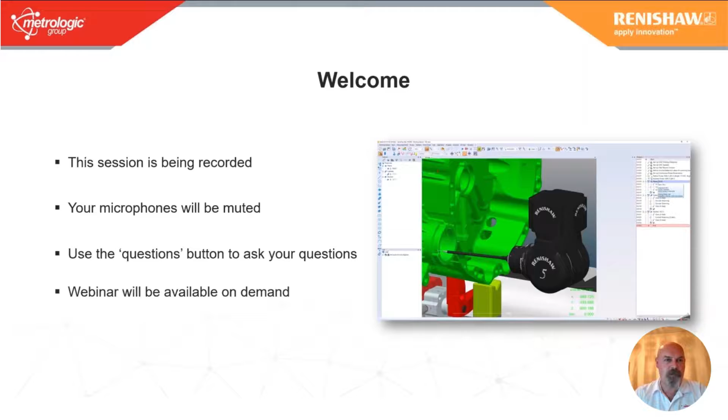So our agenda today: we're going to do a brief overview of Renishaw and Metrologic, then look at the Renishaw 5-axis technology and run through the capabilities and offering, followed by a look at the Metrologic Silma X4 offline and X4 online software solutions, and then look at both new and retrofit applications with 5-axis technology and the Metrologic Silma and X4 software to leverage the best from that technology.

First of all, Metrologic Group. Metrologic Group was founded 40 years ago, based in the French Alps near the city of Grenoble. We're the market leader in agnostic metrology software, meaning that our software is not reliant on individual manufacturers' hardware - it can work with the majority of hardware platforms available in the market. We became part of the Sandvik Group in 2018, and this gives us huge backing and support for our development, growth and future.

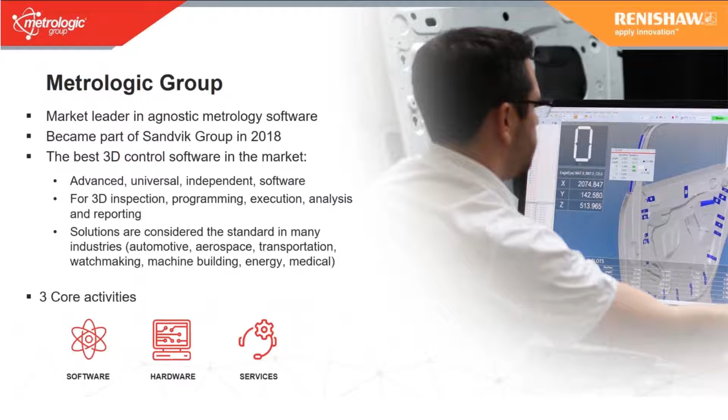Metrologic is based around three main activity areas. The primary activity is our software, which is what we're going to talk about today. But in parallel, we do have hardware available, and we also offer retrofit and calibration services where appropriate. Today, though, we're going to concentrate on the software offering.

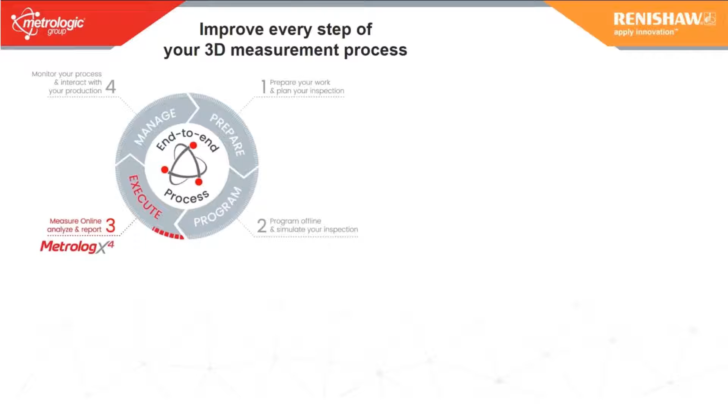Metrologic software offers solutions for all areas of your 3D inspection process, covering your full production environment. We have our Planner X4 solution, which allows you to prepare and plan your inspection process, including PMI data management. We then have the Silma X4 offline virtual twin software, which allows you to pre-program your inspection and create your test parameter programs - it works with both CMMs and also robot scanning systems.

We then have the Metrolog X4 software. This is the software that drives programs that are run live. It's a universal application that can be connected to virtually any kind of 3D CMM, portable device, or even robotized inspection cell. It allows a full geometric and freeform measurement analysis of the parts in a smart, robust, efficient, and simple manner. The final piece of software making up the suite is the Manager Suite.

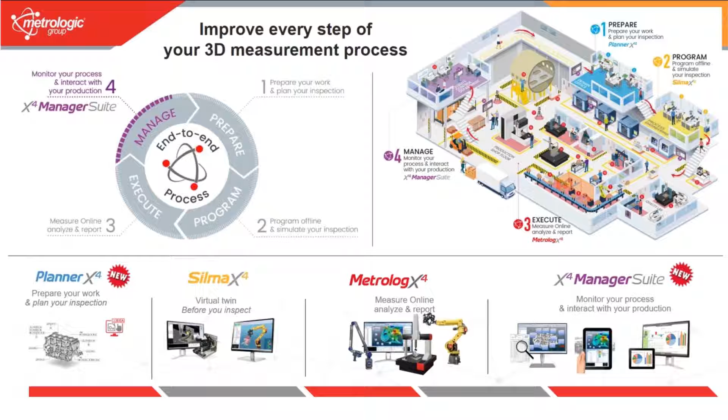The Manager Suite is a tool that allows you to view live operational information from all of your test equipment. It also allows you to capture, monitor, and manage the efficiency of that measurement process. All of the Metrologic tools can be used either as standalone or as complementary solutions to your existing setup or to each other. So I'll now hand over to Paul, who will discuss and present the Renishaw solution.

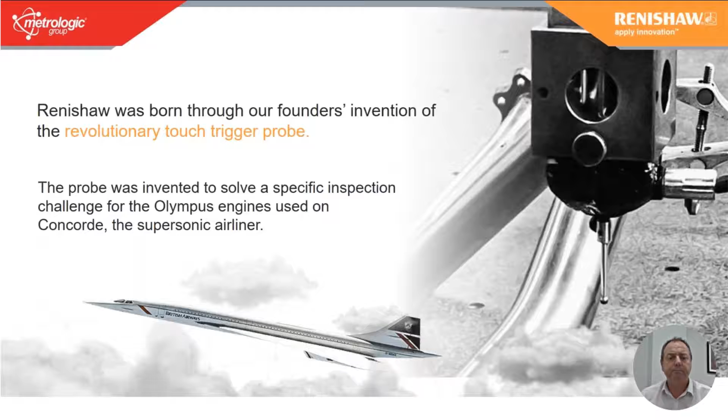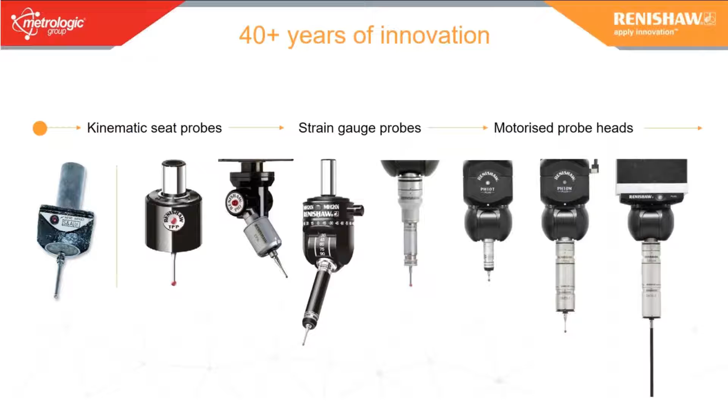We started with basic kinematic touch trigger probes and improved their performance using strain gauge technology. We then introduced capabilities such as stylus changing racks to add productivity to coordinate measuring machines. Then we introduced indexing heads, and our PH10 motorized head has continuously evolved and is still in use on the majority of CMMs made today.

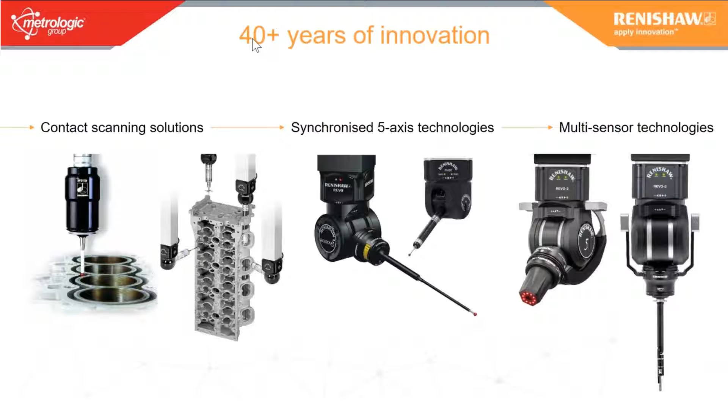And we've continuously developed fixed and modular scanning solutions for use on these motorized heads. More recently, the move to 5-axis measurement technology represents the biggest step change the company has ever introduced.

Having developed the original probe for coordinate measuring machines, Renishaw has since expanded its product portfolio to address challenges in and around CNC machining, with the first on-machine probing and tool setting systems, technologies for CNC machine performance monitoring, and

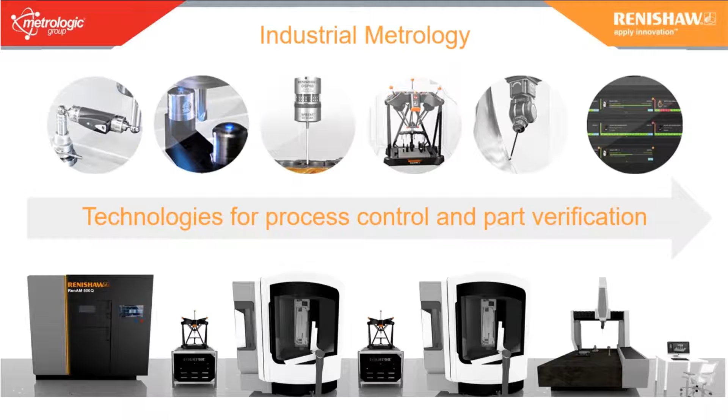more recently shop floor gauging systems to provide control throughout the manufacturing process. And today, we add value by bringing metrology to the shop floor with direct feedback at the point of manufacture. Renishaw technologies allow our customers to boost their productivity through faster setup, improve process capability, and reduce quality costs.

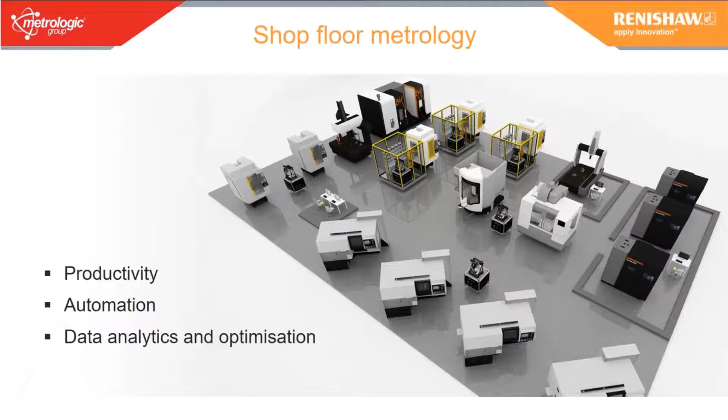On-machine and near-machine measurement systems are critical for the automation of decision-making and process adjustments. And all these systems provide process information which is collected throughout the manufacturing sequence and is a fundamental data source for Industry 4.0. But the focus for today's webinar is around 5-axis systems for coordinate measuring machines.

So first, I'm going to explain why infinite positioning of a probe head brings many advantages to CMM measurement. Then, how these 5-axis technologies are uniquely capable of delivering accurate CMM measurement at unprecedented speeds. And finally, how the REVO system is a future-proof platform for multi-sensor measurement capability.

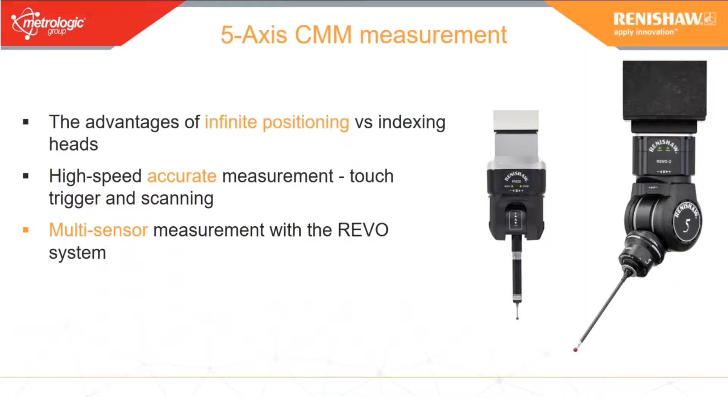So firstly, the advantages of an infinitely positioning head reduce the complexity, the time, and potential for errors in CMM measurement. Because the advantage of an infinite positioning head is that the probe and stylus are always at the right angle and you measure relative to the part. This also means fewer stylus setups, and we have an example of that in a later slide.

But the biggest operational benefit of a 5-axis head is the speed at which you can measure. And here's my colleague, Andy Holding, who will explain exactly how this is possible.

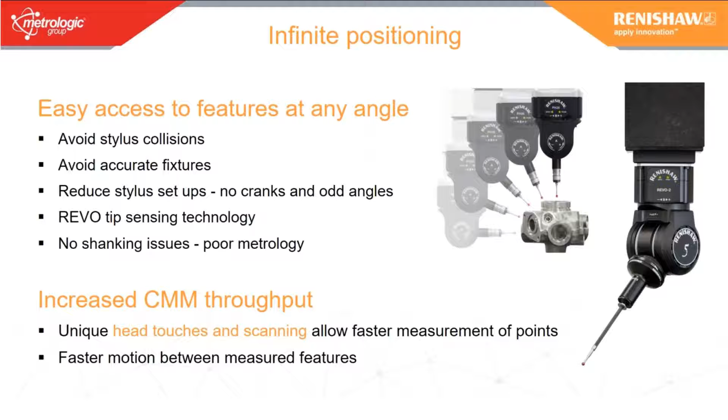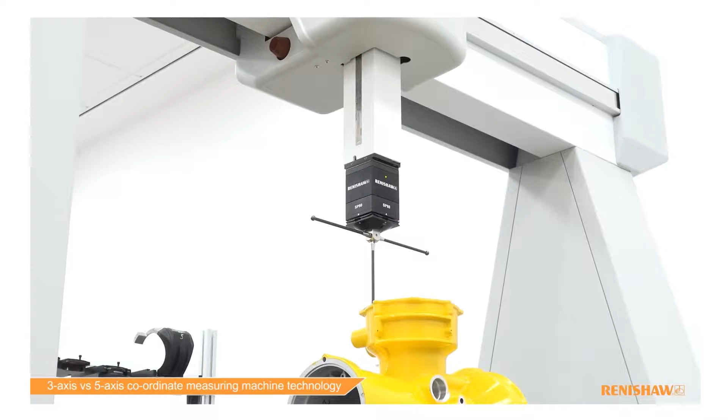Traditionally, there's been a speed versus accuracy compromise when it comes to coordinate measurement machine inspection. Some CMMs can move pretty fast, but when it comes to scanning a part feature, they're slowed right down to minimize any dynamic errors associated with the inertia of the large machine elements. This counteracts any of the potential cycle time gains made by having a fast machine.

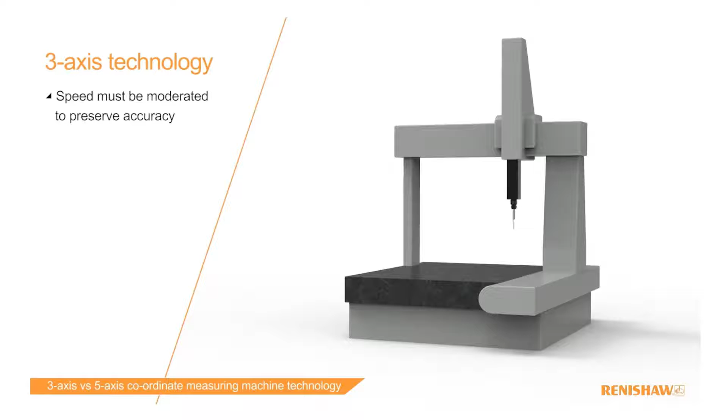CMMs will employ either a 3-axis or a 5-axis measurement system. There are some significant differences between the two. With a 3-axis system, the faster you move, the more dynamic errors are introduced to the system. This is because measurement data can only be collected by moving the 3 axes of the machine, and the inertial forces caused by the acceleration and deceleration of the machine structure introduce detrimental effects on the performance accuracy of the system.

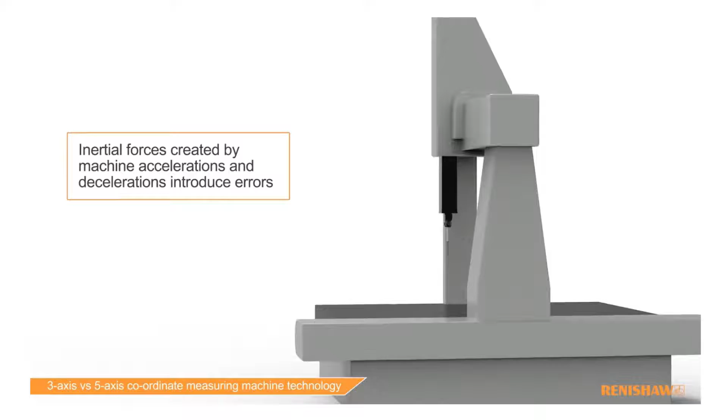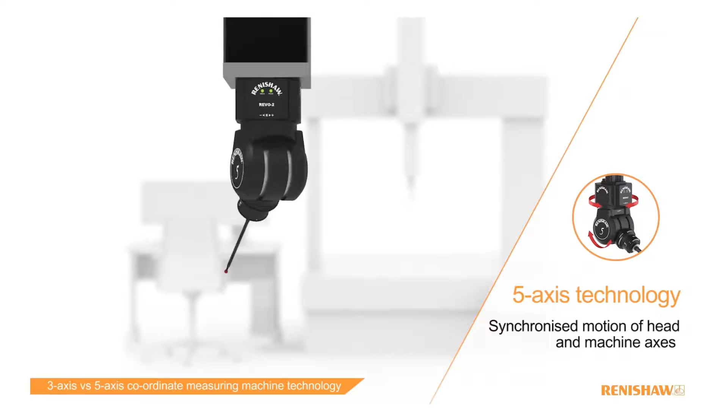5-axis technology, which is only available from Renishaw, moves the X, Y, Z of the machine and the A, B of the head simultaneously. So instead of driving the machine at high speeds and accelerations, machine motion can be smooth and continuous, whilst leaving the head to do most of the work.

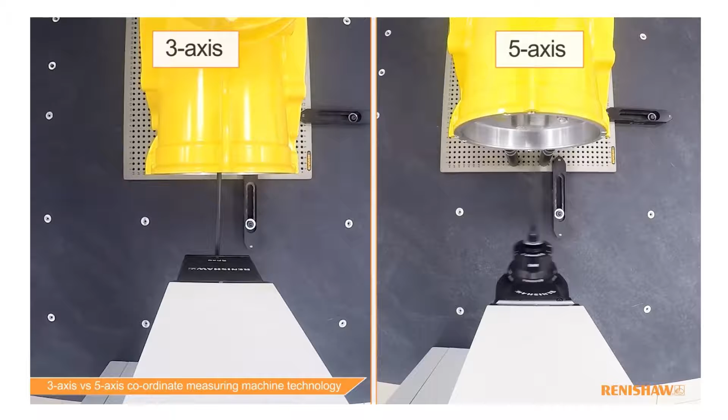Over the lifetime of a CMM, the load placed on the moving elements of the machine is much less detrimental to its performance. So when it comes to maintenance, the replacement of items such as drive belts and air bearing assemblies will be less frequent with a 5-axis system.

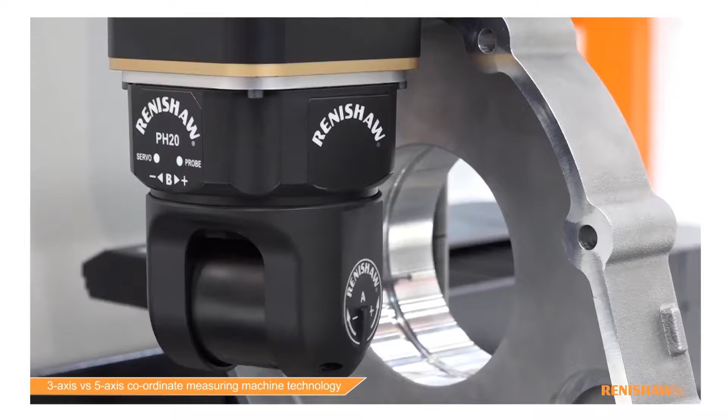5-axis technology from Renishaw is available as part of a touch trigger only system with the PH20 probe head, or as part of a REVO multi-sensor system. Each 5-axis system is complemented by a sophisticated motion control system which communicates between the machine and the metrology software to provide fast, efficient data collection.

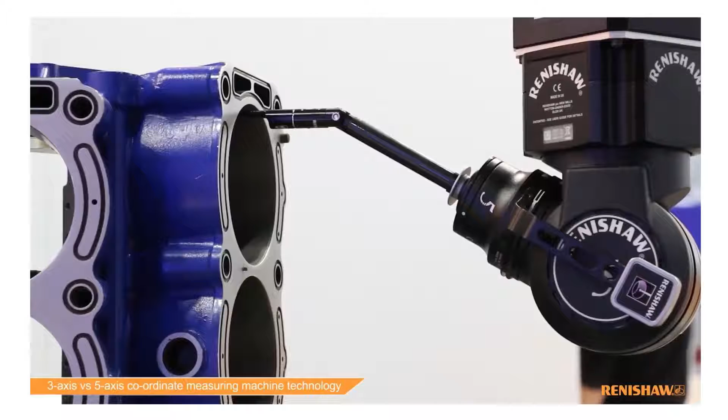5-axis systems are used extensively throughout the aerospace, automotive, oil and gas, and even consumer electronics industries.

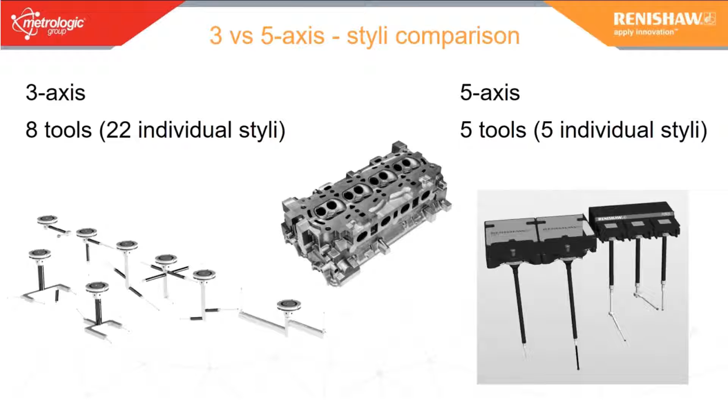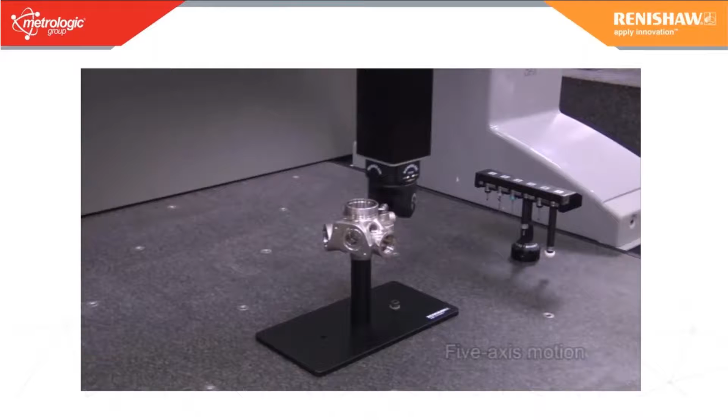So here we have some video footage of the PH20 touch trigger system in action, and as you can see, the head is making all the moves, so therefore it can measure features very quickly. Here you can see the speed at which the head can move between features, because we're indexing to the next angle on the fly as the CMM moves.

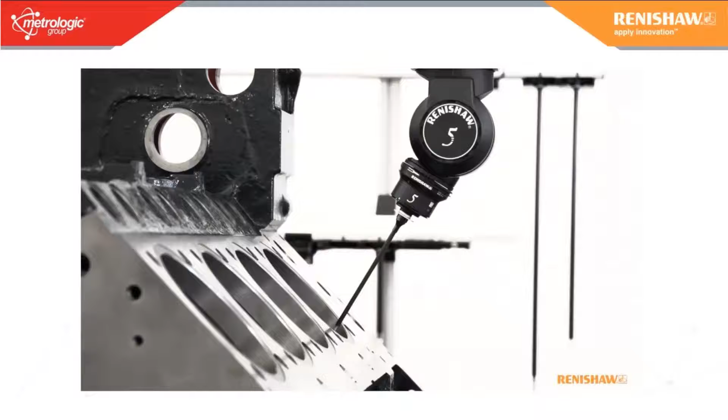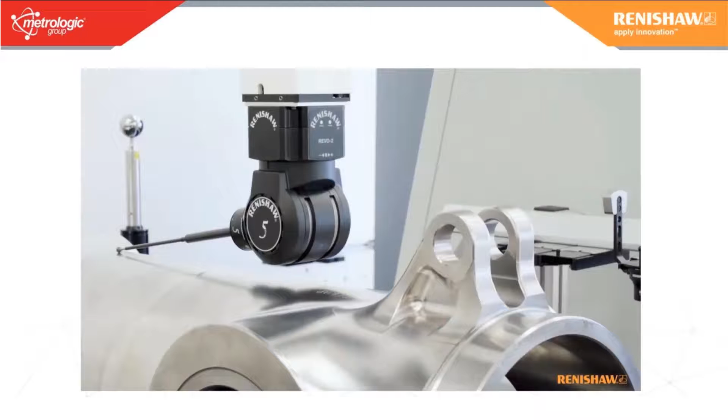And this is the REVO 5-axis scanning system, and you can see here with our tactile scanning head and sensor, we can very rapidly move across the part using the head to make most of the moves. It allows you to capture large amounts of data very quickly. In this particular measuring cycle, you can see the CMM is moving at constant velocity.

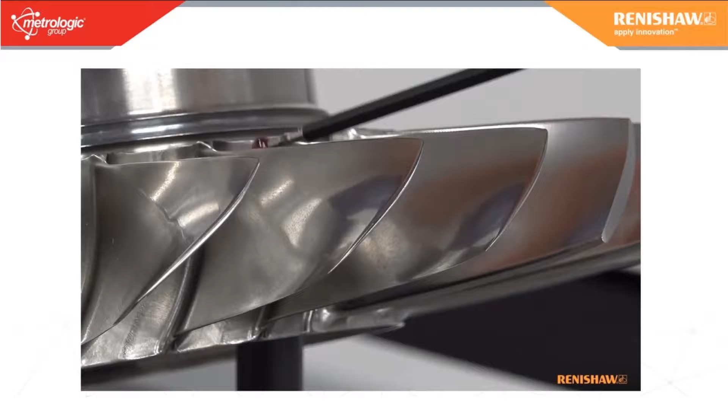So this is where we have a laser in the probe, which shines down the hollow shaft, reflecting from the tip, to give us a unique tip sensing capability.

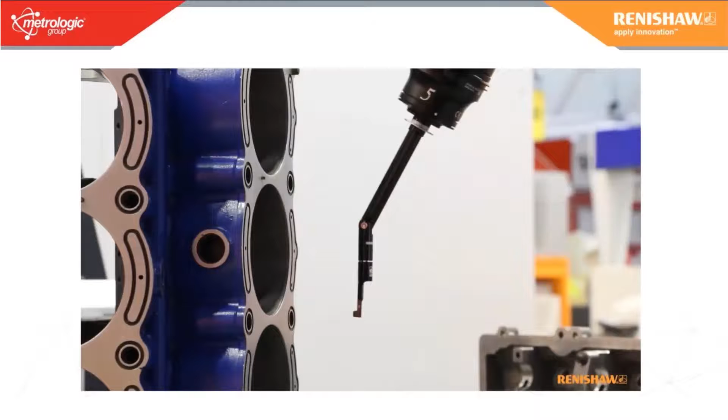As you can see here, the head moves very quickly as we scan the gasket face in an automotive application. The multi-sensor capability of the REVO head allows us to carry out surface finish measurement on the same system, the same CMM, where we've made all the dimensional measurements.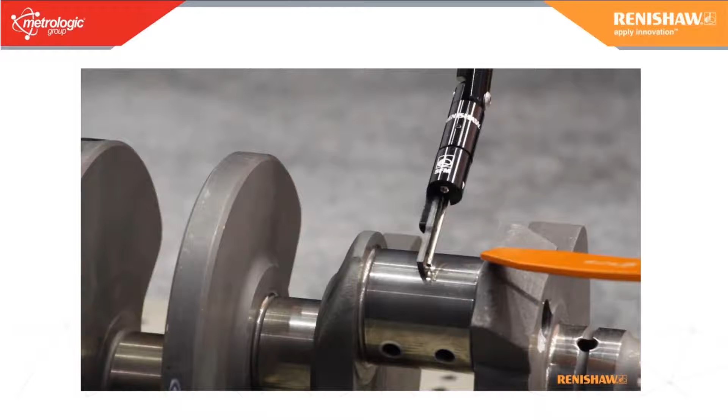So here we have the infinite positioning capability of the head to orientate the stylus pickup for faces, for bores. In this case, we're doing a lateral scan on a bearing journal, which is normally quite difficult to do with a manual gauge. Here we can see that the multi-sensor capability of the REVO system allows us to make surface finish measurements on the same device.

And the combined measurement time is less than the dimensional measurements used for comparison. Making all these measurements on one device means there's less waiting, less movement of the part between different devices in the lab, less people, and less floor space. So as you can see, the benefits of 5-axis CMM measurement are significant.

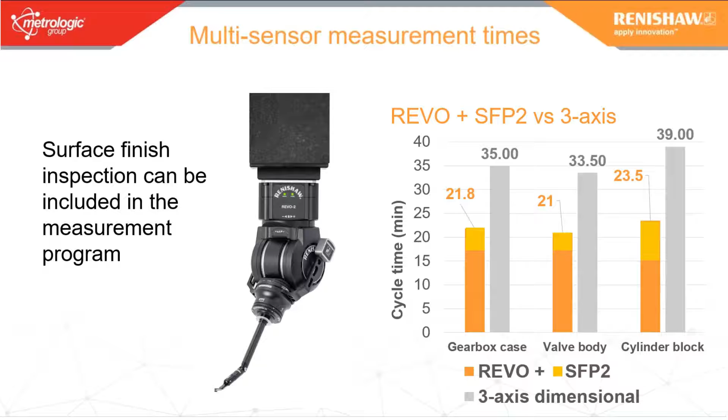Thanks very much, Paul. So having seen the capabilities of the 5-axis probes from Renishaw, let's look at how that can be maximized using the Metrolog software, Metrologic X4 and Silma offline.

We're going to start looking at the offline solution, which is the Metrologic Silma X4 product. This is a software that allows you to generate a virtual twin and allow offline programming. Programming can be a very demanding and time-consuming activity. It requires a lot of focus and attention.

And most CMM legacy software uses a DMIS program engine. DMIS is a standard programming code with specific structures and syntax which require a lot of expertise to use.

The Silma X4 offline programming and simulation software generates a digital twin, and this facilitates part programming with the advanced smart toolkit contained in the software, which allows an operator to simply and quickly generate a robust DMIS program, ready for implementation on your measuring stations.

Because Silma X4 delivers a pure DMIS code right up to the latest V5 standards, it's therefore compatible with most measurement analysis softwares available currently on the market. It provides you with smart virtual programming.

You can quickly generate your CMM paths. You have potential collision detection built into the software, automatic collision avoidance, and path optimization. These are all options available.

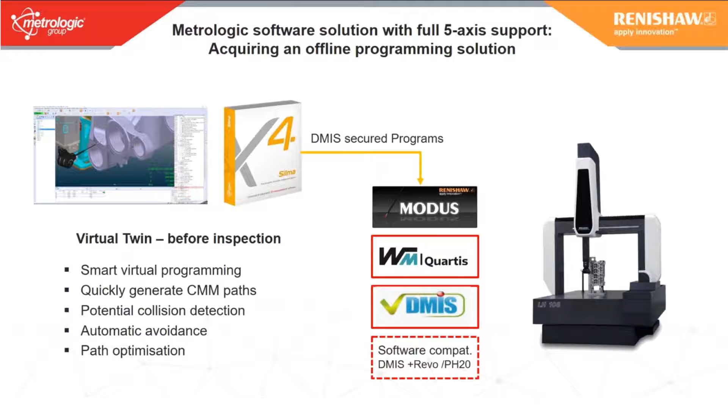So let's look at how we can generate a DMIS part program in the teach mode with Silma X4. What we're going to look at are some examples of path generation, looking at a plane measurement, which is round the gasket face.

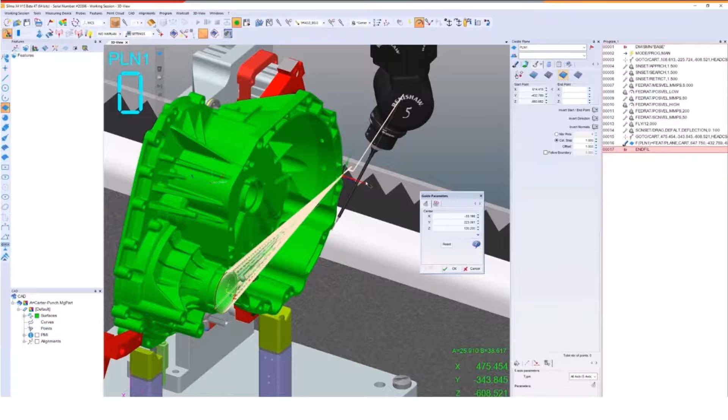In the contouring mode, we'll be looking at measurement of a helical cylinder, and then a surface sweeping measurement. As you can see on the right of the screen, we're teaching the measurement points, and then we have the animation of the actual probe in action, which allows you to evaluate before the program can be used live.

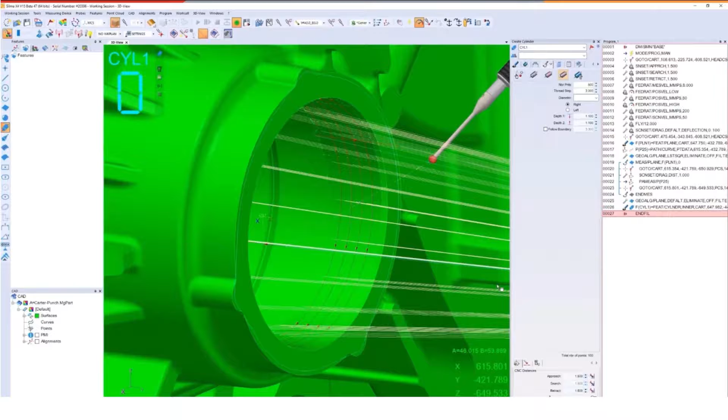What we're seeing is the creation of each feature within the teach panel on the right. So now we're looking at the helical screw thread on the internal cylinder.

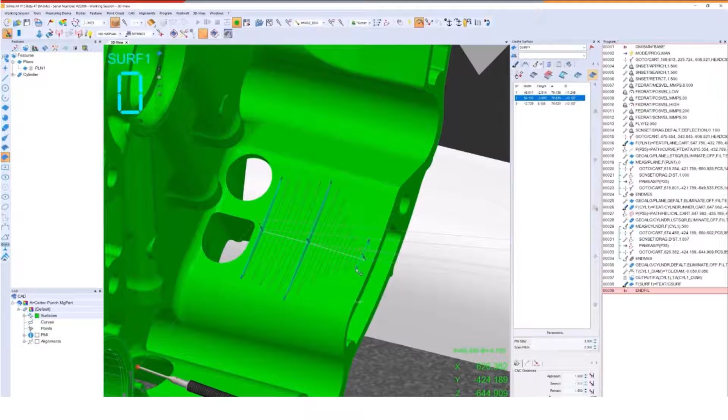We will then move across to create a surface to be swept, creating 3 reference points, and then in this case, using the graphical interface to determine the path, but it can also be determined within the parameter sets on the right of the screen.

So the measurement in the full 5-axis is completely supported here and can be managed thanks to the graphical manipulator. What you can also see is that within the simulation, the benefits of 5-axis measurement.

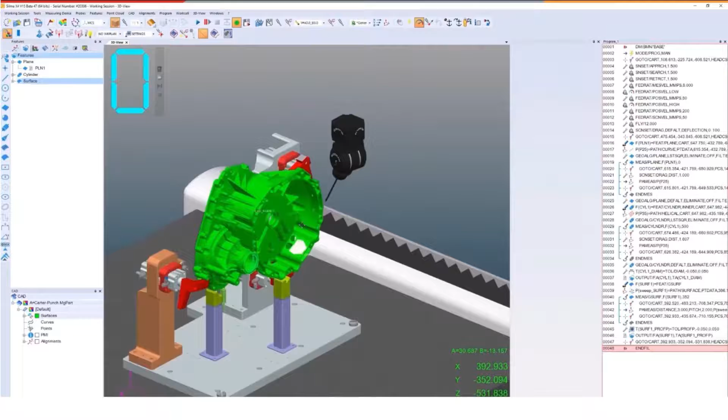It reduces the CMM movement, as Paul identified. It saves time, and it allows the probe orientation to be adjusted during the go-to path. Overall, reducing inspection cycle time and improving the accuracy in both the measurement, with reduced flex and backlash in the CMMs.

So if you're looking to invest in a new CMM, or if you're looking to upgrade your existing equipment with a 5-axis probe solution, you can also benefit from the whole X4 suite, including the Metrolog X4 software, because we have an I++ interface, direct to the UCC controller.

As we saw with the Silma X4, you have all of the programming benefits. But when you install the X4 software, you don't have to make physical changes to your CMM. There's no service requirements, there's no machine calibration, and the Metrolog X4 software can be fully installed and operational literally in minutes. That's why we're able to offer a very easily accessible free trial option.

What we're going to move on to now is to look at a scenario where we're using the X4 native program engine, and we will see the primary differences between a DMIS engine and the X4 ngprog language. Metrolog used the ngprog language, which is easily understandable with basic commands built in, and we've translated the software into 19 languages, so it's very easy to roll out wherever you are in the world.

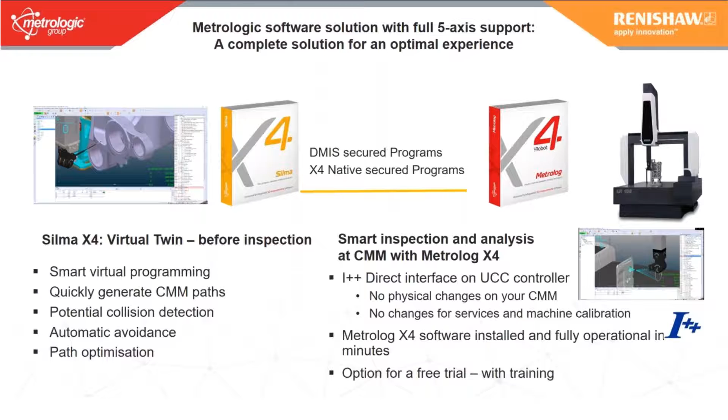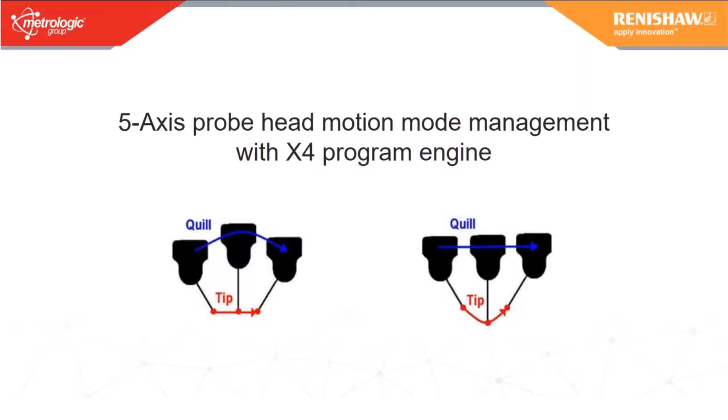The other primary feature that we operate within the software is that we can manage both the quill and tip modes that the 5-axis heads provide. For anybody who's unfamiliar with those definitions, it's something that's unique to 5-axis heads. The tip mode is where the head is moving dynamically while the tip remains fixed, and the quill mode is where the center of the head remains fixed while the tip moves dynamically. You can see them both in that video.

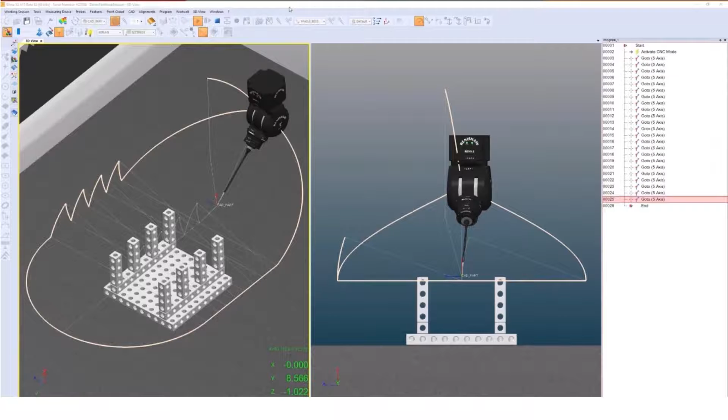So moving on to the next phase, which will be probe manipulation and path configuration within the X4 native programming environment.

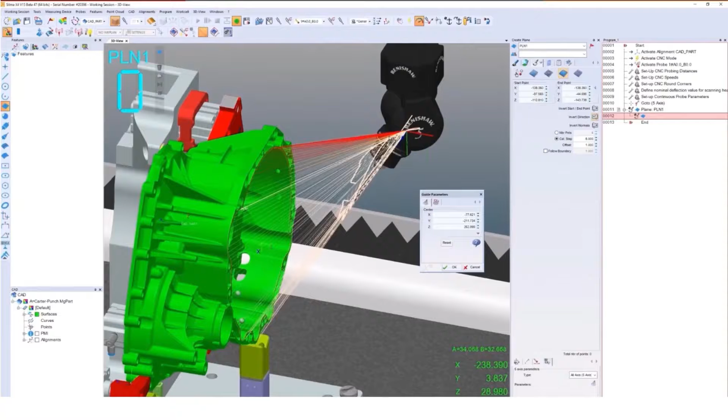What we're seeing here is we're selecting the gasket face of the piece. The software allows you to customize the probing path. In addition, you can see there's some orange and some red identifying elements. Those show you that that probing position is actually outside the optimal orientation for the probe angle. With a REVO head, that's a 60-degree angle to the surface, and 45 degrees for a PH20. So where it's red, it's exceeding that value, where it's orange, it's getting close to that value, and where it's yellow, it's within the optimal probing zone.

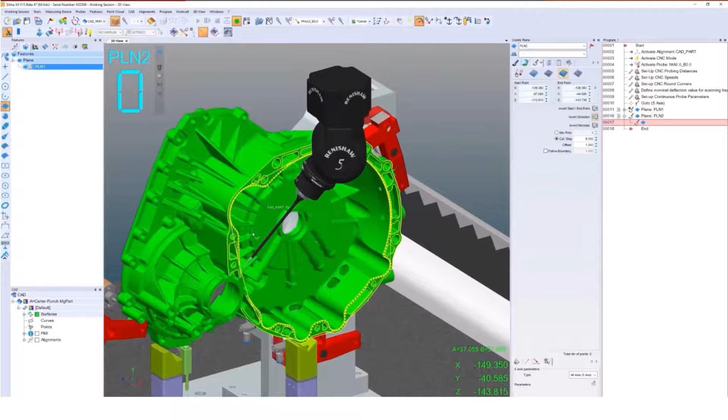You also saw in the video that we can easily manipulate the position of the head within the software to bring it within that optimal probing tolerance.

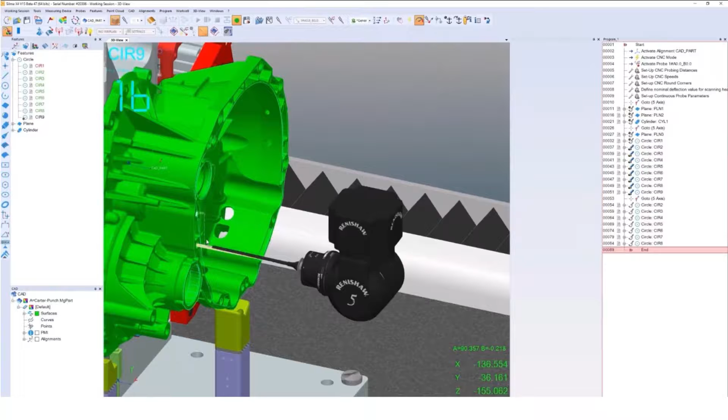Another key feature of the software is if you have multiple features that you want to measure, which are identical but differently positioned, all you need to do is program the first feature, and then you effectively copy the parameters to each other feature within the teaching frame on the right, and that then allows repeated probing of a common feature.

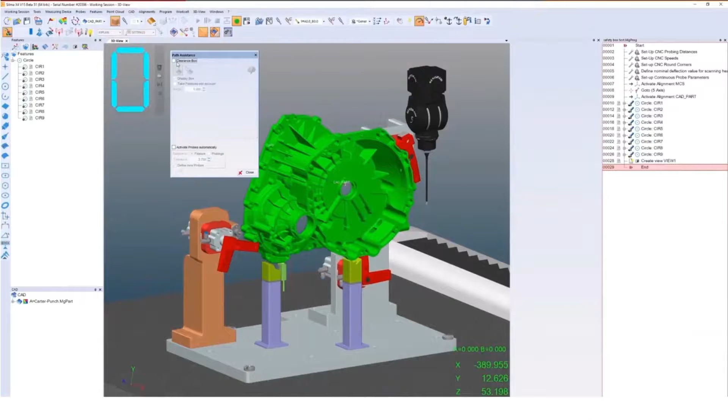One of the points that's absolutely key when you're operating a CMM with an expensive probe head on is that you have some form of collision avoidance with a safety or a clearance box. If we look at the basic management of these via point transits between features, we would normally just set up a basic collision avoidance box. This then means that any transit from different faces of the workpiece take place with all of the head and probe elements being outside of that box. Very simply, it makes for a safe environment, and you completely avoid the risk of any collisions.

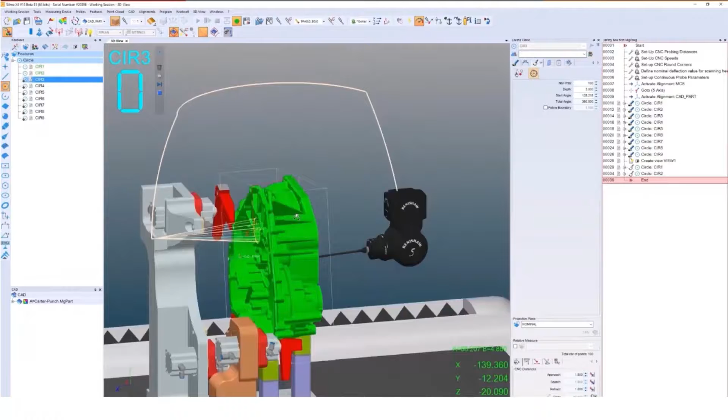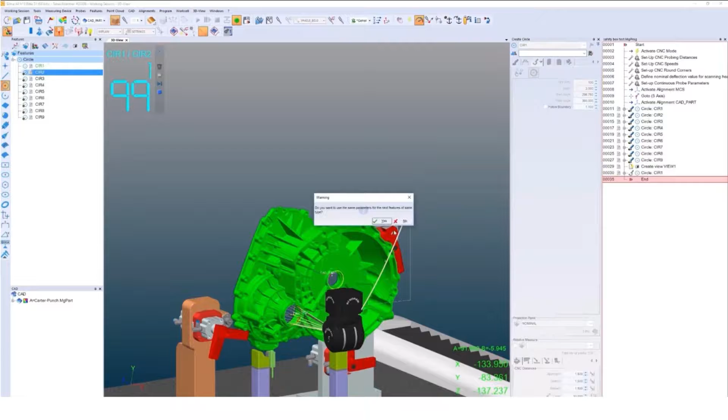So just moving from one side of the workpiece to the other. However, within the Metrolog software, we have smart collision detection and automatic collision avoidance options. What this means is that if you select the collision detection and automatic avoidance before you start creating the measurement program, the software will automatically identify if there's a collision risk and build in an avoidance path as part of the program.

You therefore have a collision-free inspection program.

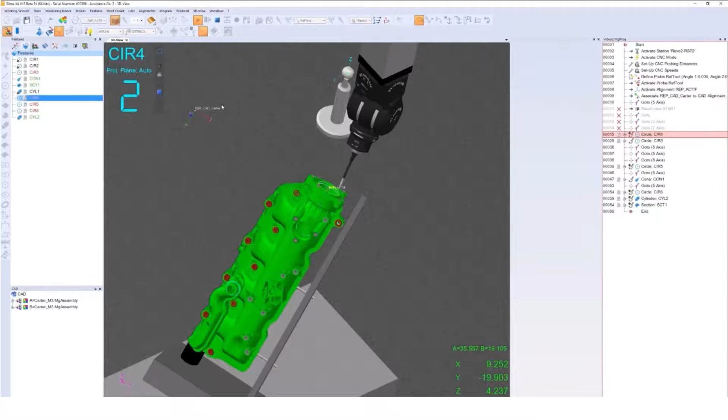What you can also do, if you haven't activated the collision detection and avoidance before you create your program, is activate it after it's been created. Then the path is automatically checked and, if necessary, modified to avoid any collisions. This is under simulated running conditions.

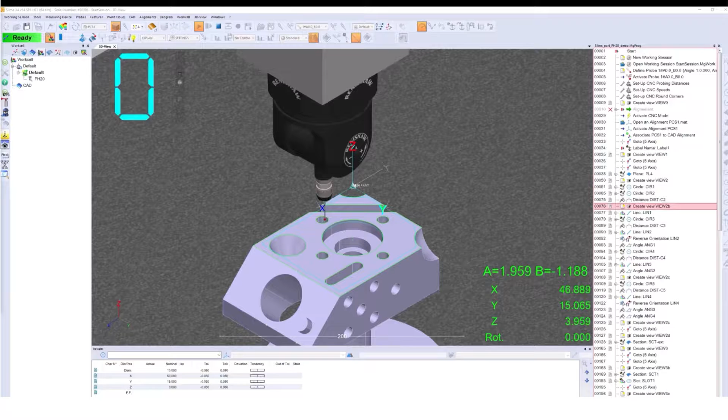We've been looking at the REVO head. When we come onto the PH20, as with the REVO head, it can be completely managed within the Metrolog X4 environment and the Silma X4 simulation software. Programs can be generated automatically, and they're easily edited as required within the software.

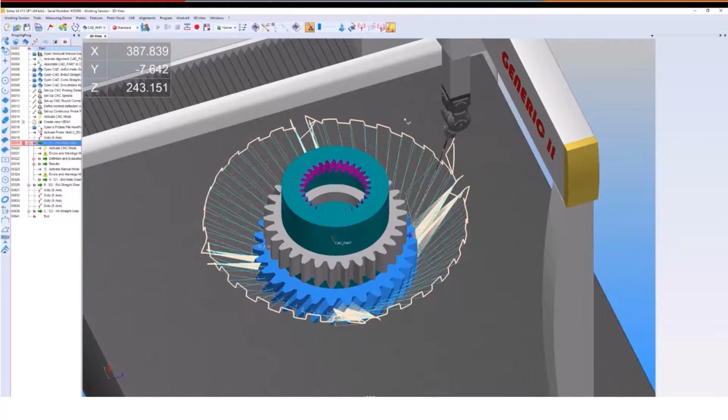When we start looking at special measurement options, one of the features available is a gear measurement solution. With this as an additional option, we can measure helical gears with an easily configured programming capability, and all of the gear parameters selected by the programmer are pre-stored within the software, using parameters defined by AGMA, DIN, or ISO norms.

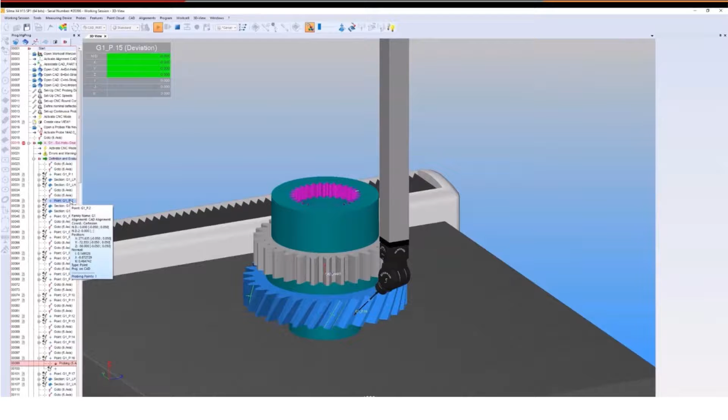So we have measurement of the helical gear using reference teeth and then running it out along the number of teeth programmed within the parameters. In addition, we can measure spur gears, and we can also do internal measurements of helical and spur gears, all with parameters coming from within the software through intuitive programming.

Next, we move on to one of the key areas of any metrology facility, which is the generation of reports, because data is key to what we're working on. Within Metrolog X4 and Silma, we have the ability to create reports. It's a straightforward and intuitive module which enables presentation and identification of measurement results, along with graphical rendering, deviation, and compliance information.

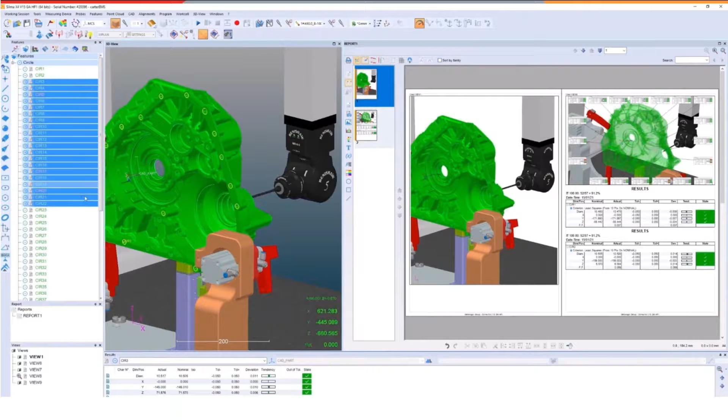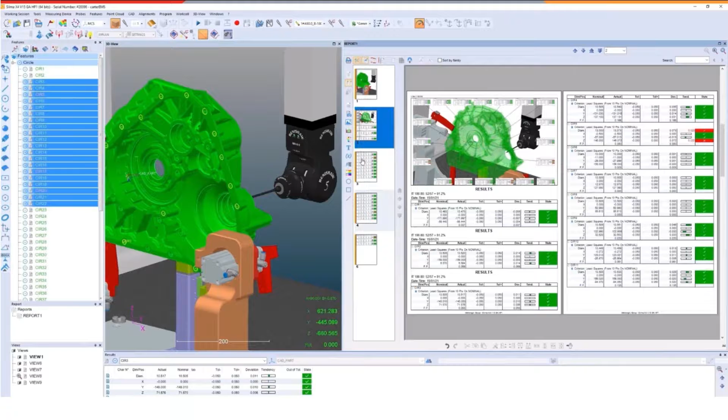We can identify key measurement points of each feature being measured on the graphics, with documented tables to follow. This is all available with the X4 report editor. The programmer can select the elements of the report, and it's fully customizable. The report can either be printed at the end of the program run, or at the end of a complete working session, the full set of data can be opened in another option, the Metrolog iViewer. It's a free option that we have available.

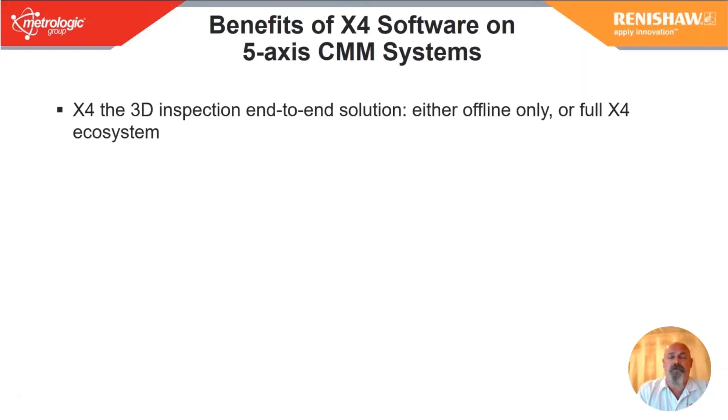So in conclusion, looking at the benefits of the X4 software on a 5-axis CMM system: we have the X4 software offering 3D inspection and end-to-end solutions, either offline or in a full X4 ecosystem. It's backed by 40 years of development experience of a universal, agnostic software, the Metrolog X4. We have advanced DMIS and X4 5-axis programming with Silma X4 offline.

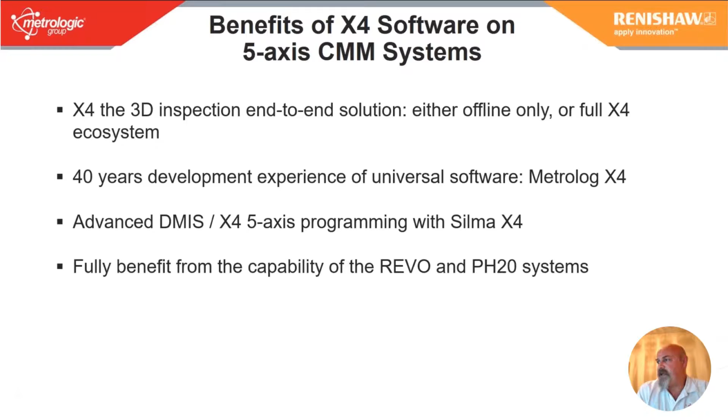We fully benefit from the capability of the REVO and PH20 systems and offer full control. There are also options available for gear measurement. We do options for blade measurement and also surface finish. And when looking at outputting the data, we have a fully customizable report editor.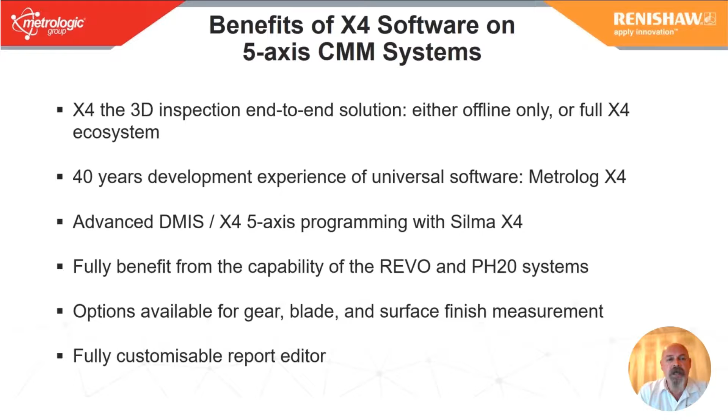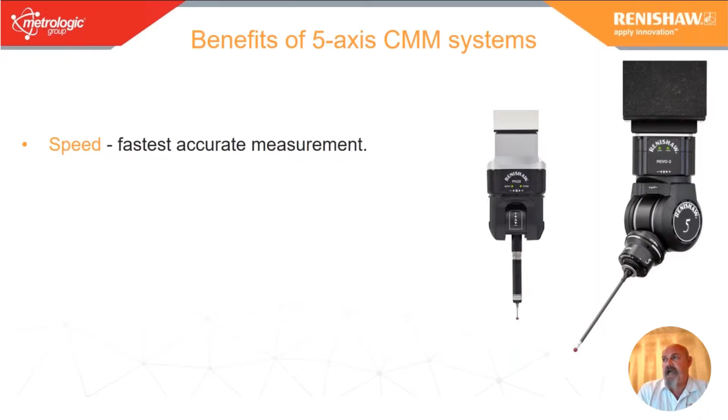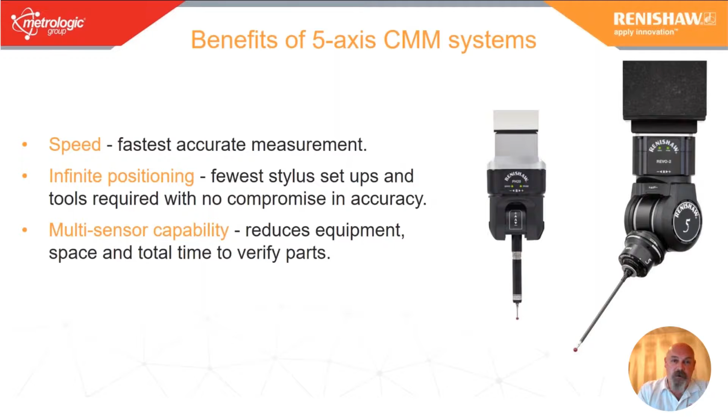Looking at the hardware, the benefits of the 5-axis CMM system are, first of all, speed. It's the fastest accurate measurement solution. You have infinite positioning, the fewest number of styli setups and tools required, with no compromise in accuracy. You also have multi-sensor capability, which reduces the equipment, the space required, and the total time to verify parts.